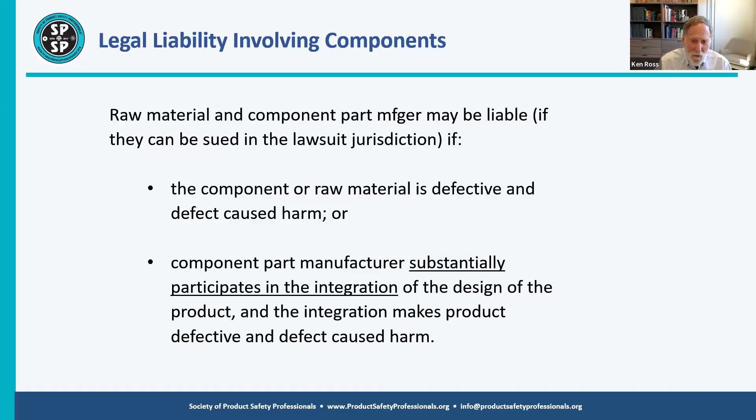So sometimes the law discourages actions by one side or the other, which is not that helpful from a safety standpoint. So you're the OEM dealing with suppliers. So I'm the OEM, I'm buying components.

You've got to decide which ones am I going to buy, which ones am I going to make myself, which suppliers do I have? Do I have multiple suppliers? Is this a safety critical part, raw material, and service?

Now, interestingly, because of that law, it's an interesting question whether the OEM wants to help the component part supplier design their component part. And of particular interest to me, what is the role of the OEM in being sure that the warnings and instructions supplied with that component part are adequate? Do you really want to do it?

So the more the OEM gets involved in the design and the warnings and instructions on that component part, the more they're responsible for the ultimate component part. And so if that component part was designed incorrectly or there were inadequate warnings and instructions, they can't blame the component part manufacturer because they're going to say, hey, wait a minute, you approved my design, you approved my warnings and instructions. So if there's something wrong with any of those, you OEM are responsible for it, not me.

So there can be a lot of tension between an OEM and a component part supplier because each of you are trying to protect yourself in the event something goes south after the product is sold. So there's both the legal side of it and the contractual side, the insurance side, and the safety side. And I will say sometimes they don't match up as far as the encouragement of what's going on.

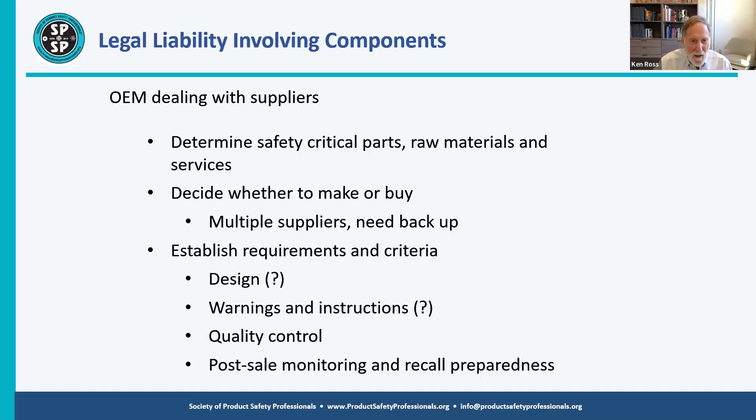So as a result of this, we the OEM are trying to obtain contractual and insurance protection. We're trying to figure out if that really protects us, whether it's adequate, and in what situation will it protect us? Again, the more involved the OEM is in the component part, the more likely they are to be responsible, and they cannot blame the component part supplier.

Lastly, you don't want to rely on contracts and insurance to protect you. You as an OEM want to be sure the components you buy are correct, they're installed correctly, and that they are safe for their intended use.

Now, on the supplier side, it's very different. Do I want to assist the OEM with a selection of appropriate components? I think you do, but some lawyers are going to say, no, we don't want to help because the more we help our OEM, the more responsible we are. We want to confirm the components are being used correctly and installed correctly. That's my coffee maker example.

Should my company have been sure that the coffee maker manufacturer both selected the correct thermal cutoff and installed it correctly? Well, on reflection, yeah, we probably should have done that. Should we have had to do that? No, we shouldn't have had to do it. They were a coffee maker manufacturer. They should know about it.

One thing that's very interesting to me is I'm an OEM, I'm buying component parts. What if I find that the warnings and instructions of my component part supplier are inadequate? They don't meet the ANSI standard. What do I do? Do I tell my component part supplier that they need to redo the warnings and instructions? Do I need to have them hire a warnings expert to come up with better warnings and instructions?

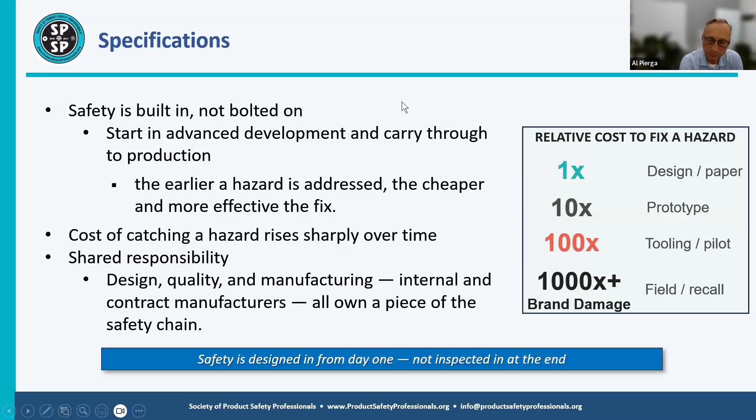And when it comes down to dealing and collaborating with outside suppliers on parts, that becomes even more important to make sure there's clear communication and expectations are well managed. Which also going in reverse, as Ken mentioned, being a component supplier, you need to clearly communicate boundaries and kind of the operating parameters that are acceptable and communicating any specific technical limits. So it's important that the communication is clear and there's clear alignment between all parties to emphasize the important safety elements in the design. Can you please switch to the next one?

So one thing that is important in there, right, is to make sure specifications are written very clearly. And that really sets the stage for everybody to align and understand what the expectations are all the way through the product. Things like physical characteristics, size, weight, color, chemical makeup, material properties that you're looking at, any performance specs that you're looking at,

and the life. Because one thing to remember is that the expectation is the product remains safe through the life of the product. Often the question is, well, is it warranty? Is it maybe 5 years past or whatever that is? I think it's important to keep in mind that it should be through the useful life of the product, whatever that may be. It has to be clearly defined, and then we can work from there. Next, please.

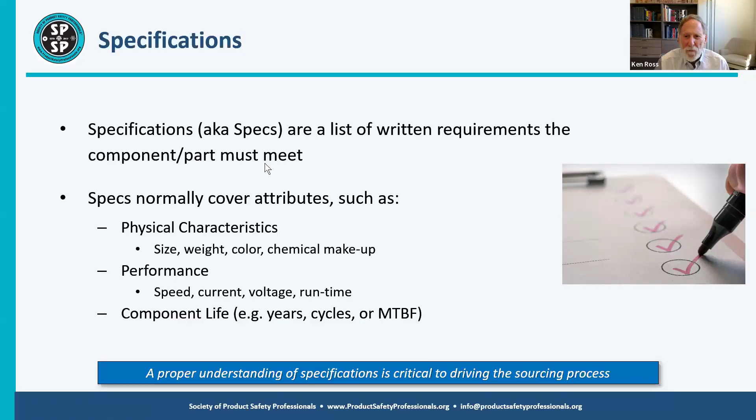Oh, oops, sorry. That's okay. Yep.

So further on the specs, basically we're looking at the standards that we have as underpinning within the organization. What are your engineering standards to make sure that they're suitable for specifying these critical parameters that need to be maintained to maintain safety? Any models that you develop, drawings, how well they're specified, anything that we need to implement in terms of specifying critical dimensions or maybe critical functions, all those attributes, processing also, material specifications, all that is important to capture and clearly draw the line of what is acceptable and how good it has to be to meet the objective.

Of course, applying external standards that are applicable. Sometimes the standard may not be entirely applicable, but you want to apply the elements that would be reasonable in the case that you're dealing with to mitigate hazards, right? So there are some good engineering solutions throughout the industry that address many challenges that we're still seeing and we'll be seeing for a while. So that's a great resource to really know those and apply them appropriately. Of course, the federal standards we are obligated by law to comply with.

The CPSC governs certain product categories. FCC applies rules in many ways. FDA, for example, you got FDA with lasers, right? You don't think FDA is with lasers, but they do that. So we've got to be very familiar, and prior to implementing a technology, we need to understand the obligations that apply.

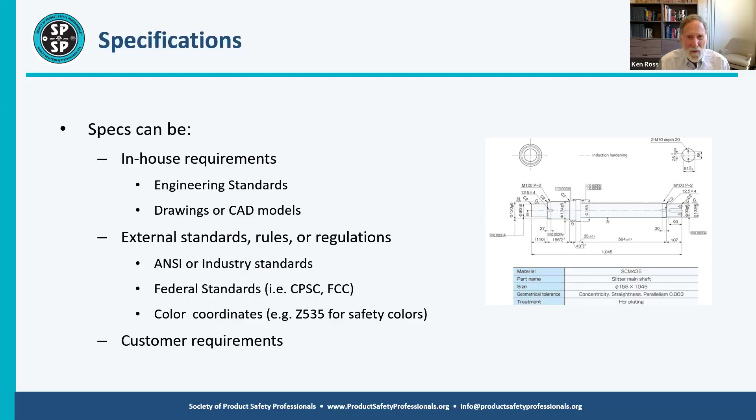So moving on to get more granular here, there are multiple ways to specify products, and different control methods that we can apply through the process. Oh, the previous one, please. Sorry about that. Some things come to mind in a clear list: dimensions, tolerances. What we often don't think about is how you want the test to be performed to validate and ensure that the design and the parameters are maintained.

Also, when it comes down to safety, you definitely want to talk about statistically meaningful sample sizes. Testing 1 or 2 samples is not statistically significant, as you know. That is always a tough situation because depending on where you are in the development process, you may not have enough. So it's very important in the beginning, when you outline safety concerns or safety critical elements, that somewhere in a test plan you identify the increased number of samples so the teams can plan to accommodate the validation.

And then it's extremely important to have acceptance criteria that are very clear, to make sure that the target is clear and that the decision can be made without really second guessing. And of course, I would suggest that everybody reviews the acceptance criteria and buys into it, because there are plenty of circumstances where things fail and then suddenly the criteria is in question, which is not really a great way to solve the issue, but that's not uncommon. So coming to the same conclusion and agreeing is critical.

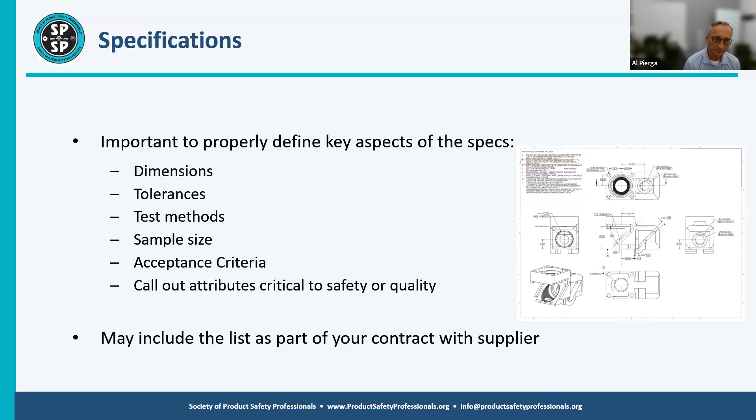Here, what you'll see is just a sample of what a specs drawing could be. You clearly describe in this specification the tests that are used to validate the specifications that are to be met, the procedures, and also the sample size that you're looking at. Those are important things to outline, as I mentioned earlier, having that clear up front as a test plan, as an expectation, and also the pass criteria, so everyone can align and plan accordingly to assure that all these are executed completely and successfully.

Well, thank you. I'll pass it on to Mark. Okay. Mark, are you there? Yep, I sure am. Okay, so we're going to start.

Okay, so we'll go from the specifications to the supplier selection and evaluation. But before we do that, let me just ask Al a question. You've got the specifications. Obviously, you've got to follow up and be sure that they're meeting the specifications. How involved do you get in confirming that they are meeting those specifications, as far as the test methods and other things? Yeah, so I think Mark will cover quite a bit of that, but generally speaking, this is a thorough process all the way through.

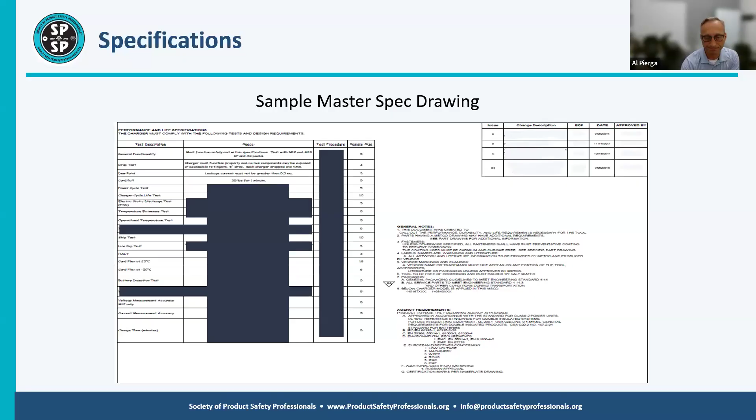And so ideally, you want the products at incoming inspection to come in with all the substantiating evidence that they do meet the obligations they were asked to per drawings and specs and all the parameters we defined earlier. So it's quite a bit of a system that needs to work in concert. But once it's set up and it's moving through, you can work through very complex cases very efficiently, and you have all the controls set up for long-term monitoring. Okay. All right, Mark.

Yeah, thank you. So as Al said, it's a big deal that you set up everything on the front end. And I think one of the key things there, like Al was sharing, is the specifications, the drawings; being upfront with those is really a big deal. One of the things that I like to do and suggest to folks is when you get in with a supplier, at whatever level, build a relationship. And I don't mean that facetiously. I mean, you really have to get involved.

And I like the concept of partnership versus supplier when you can, because partners have a tendency of being more tied to the result. They're more tied to the success of the business. And whenever you can develop that concept of a partnership, there's skin in the game. They want to develop something that meets their obligation, not because the law says or because a contract says, but because they want to. And they're in this relationship with you. And I think that goes a long way.

What helps is when you have a strong, robust set of requirements, you can go to your partner and say, these are what I'm trying to achieve. Do you agree? Can you work with me on this? Is this something that makes sense to you? The more nebulous it is, the more open, the more flexibility they have, one, the less certain you're going to get what you want. But secondly, there's more opportunity for things to go sideways.

And I'm not saying you've got to tie everything down in infinite detail, but I think you have to do what the safety professionals do best, which is do a hazard analysis, understand your product, understand the point of this component, understand its role in relation to the safety of the product, what can go bad, and tie it down commensurate with that level of importance.

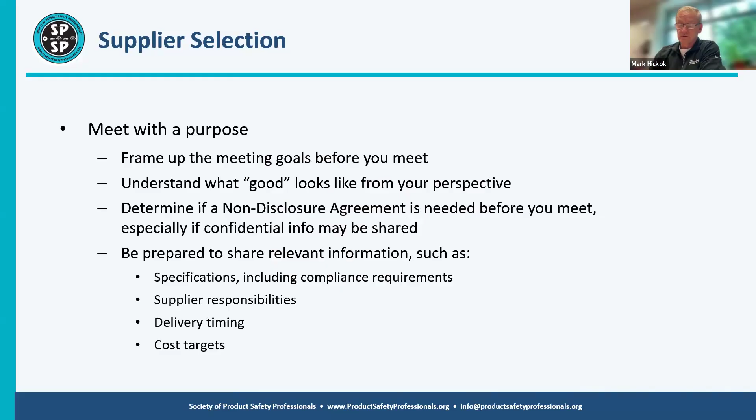And we're going to talk about that. And then we're going to go look and compare what we get. And we're going to say, well, we looked at you as well. And from what we're seeing is, yes, we agree with you. Or in part, we agree with you, and in part, maybe we could do a little better. And here's where we need to go better.

If you audit for the first time at the end of the stage, you're probably making a mistake, to the extent that you had a chance earlier and you didn't take advantage of it. So it's not really a validation anymore. Now it's an initial audit and you probably got a problem. So these pre-meetings, these pre-assessments, those early opportunities become kind of mini audits in their own way.

And that gives you this opportunity to pick something up, figure out how to make sure that they're doing it well. They made changes. You can measure against what you think they should have been doing and see whether those changes are going to be effective. And you can move yourself forward. So validation is exactly that. It should be validating what you already know or believe to be true. But if you're learning at that point, it might be a little late. It depends on what you're doing.

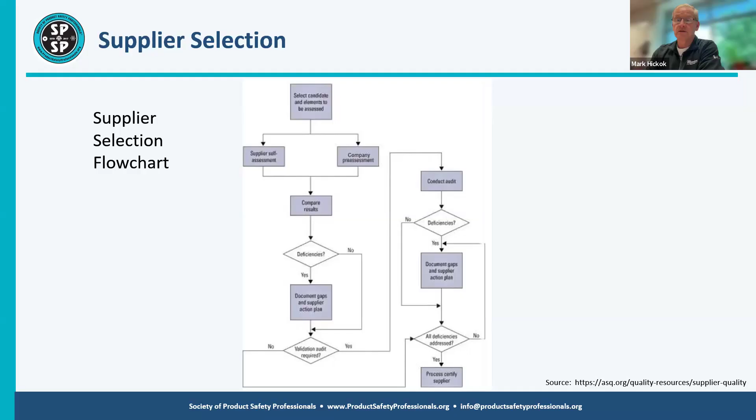So one of the things we love to do, also as part of our audits, is set up a test plan. We don't just audit and walk around and watch people do things and measure things and do checklists. There's certainly some of that that's important, but we also love to do test plans. And one thing about test plans is that when you do, especially a component like an electrical component, those very often have ratings and they're built off of some set of standards, whether it be a product standard from UL or a safety standard or what have you.

And they're typically meant to say, yep, this component can carry this much energy or can hold this much temperature, it'll deliver this much liquid, whatever the answer is. But it's almost universally not set up to check exactly the situation you're in with your product. So it's really important to look at the product you have, know what needs you're asking that component to meet. You believe those specifications gave you a chance to say, yes, I picked the right one. But now I have to go exercise that to see, is it really going to be effective in this thing?

So set those goals. Figure out where you're going to do it. Am I going to do it? Am I going to have the partner do it? Am I going to send it to a UL type lab and have them do it? Or a third party evaluation center? What do I need to do?

These are all important. One of the key things I think most people miss is the method. So when you get down to the test definition, we've seen a number of people that will test to UL and they'll do the minimum of something in UL, and then we'll come out of it and say, well, UL gives you this option and we like it that way. And they're like, well, we didn't do that. Get that up front, get alignment on what that method is. So when you get the results, you can measure them against an acceptance criteria. You're on the same page every time.

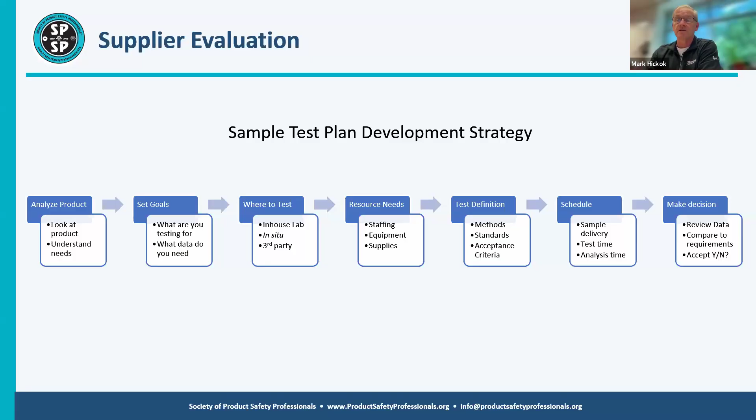Scheduling obviously makes a difference. So make sure you've got stuff in time to do that and do a good analysis so that you don't end up running into timing issues. And then make a decision. All of this data, all this information, all these conversations put you in a great place to make a decision. So now it's time to go make one.

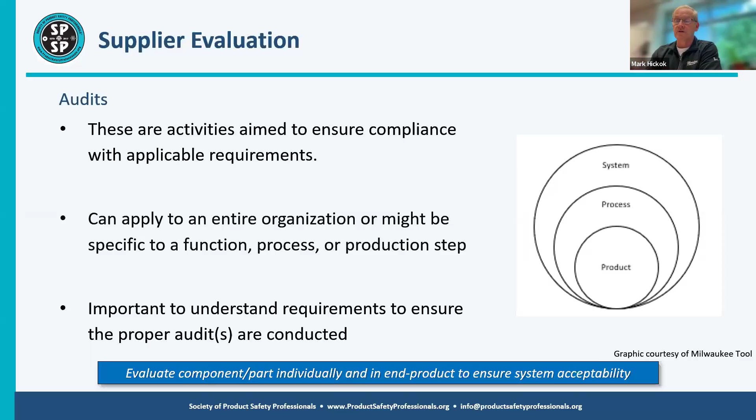Absolutely, no problem. So after you've got all this stuff done, we're happy, we're moving forward, then we go back and audit. And I like to consider things like a 3-phase audit process. I like to audit the product, make sure it's right. That's part of the testing we talked about. Audit their process. Can they make it? Can they make it consistently at rate? Audit the system. Is it controlled? Are their suppliers controlled? Is everything going in right? So again, go as deep as you need to go, but making sure those things are done is a big deal. It's not over just because I made a selection and made a decision.

Okay, next. And when I go through these, one of the things is there's always multiple functions. So maybe it's not one visit, maybe it's multiple visits. Maybe it's not the same person. Maybe there's multiple people. Maybe there's multiple things that have to be done. Fine. Plan for it, set it up ahead of time, be ready to go. Okay, next.

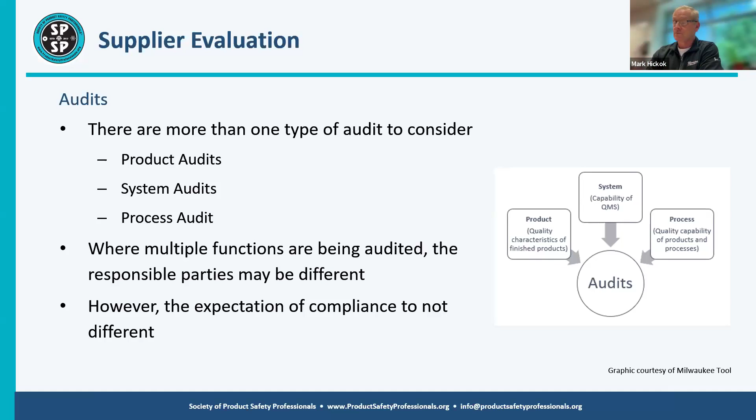And be prepared that this is, again, not a one and done. This is not something I do, make a decision and move on. You might have to have ongoing quality. It's not uncommon to hear the concept of the golden sample or the golden pencil. There's always going to be a great one. Everybody's going to give you their best effort on the front end. Can you actually make it 10,000 times a week, every week for a year, with that level of quality?

Have you done the right things? Which means you've got to monitor and find out if they're doing their job. So don't stop just because you've made a decision. You've got to keep looking at it. A lot of factors can go into it, but you've got to keep after them. Okay, yeah, we've had that problem lots, particularly with products coming out of Asia.

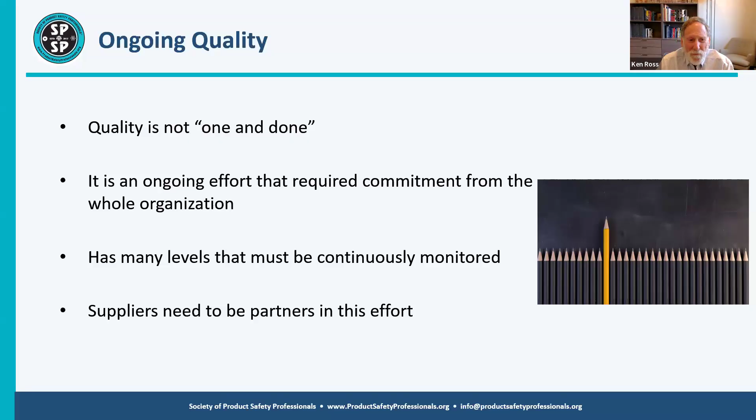Whether it's that they give you the golden product at the beginning, or they change the material after they give you the sample to save money, and they don't tell you about it or get your approval. So you have to be very careful, particularly when the components are being made offshore. Absolutely, and really, components and materials are big.

Watch process. People can go faster and make plastic parts faster if they increase the temperature and mold pressure. You can embrittle the plastic and make it garbage. So they're now delivering 15,000 a week, but you're getting 15,000 a week of garbage. So watch that, understand the parameters. So when they want to make those changes, you can say, nah, I don't think so, because it doesn't make sense because you're going to make a problem. Or let's validate that change before I let you go full production on it, because it can make a huge difference.

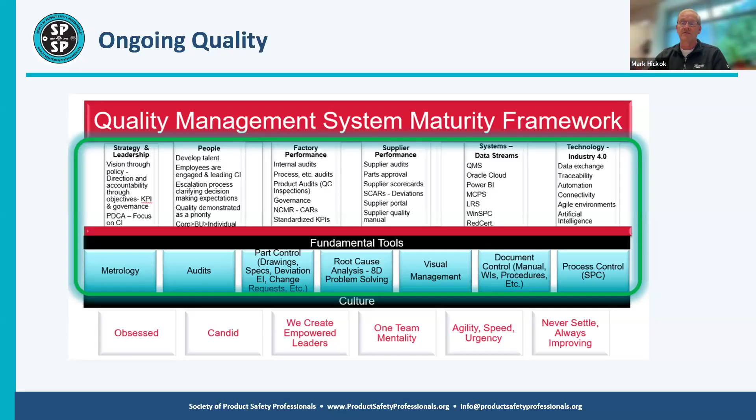Okay. And then last, I think we talked a little bit about it earlier, but work with your legal professionals and make sure that your supply agreements, to the extent you can, cover all the key things, all the key specs, the things that you want to deliver, all of those little things that you talked about in your discussions. Get them on paper. Will it support everything? Will it be completely clear? Can it be completely legally defensible? Will you still have arguments?

Yeah, maybe everything's going to be great. Maybe it's not. But you will give yourself the best chance to handle this by working with quality legal professionals and getting a really good agreement, so you're on as good a page as you can be. And then see where it goes. But I think that gives you a great chance to succeed.

Well, and let me say from the legal side of it, be careful that your lawyers aren't too careful and too cautious, because you'll wind up never having a supplier who wants to sell to you, because you're trying to shove liability off on the supplier when it really isn't called for. So you want to be careful, to have them be realistic about the relationship you're developing. And to a certain extent, we're relying more on our good working relationship and not going to meet the exact language of that contract. Okay, let me get a couple questions and then we'll be done.

How should the conditions of acceptability be addressed? This is a concept that is not very well understood by many design engineers, procurement, and other members of the organization. There is a misunderstanding that any NRTL certification is sufficient. I assume you guys know what that means. Yeah. So if I can take a step at it, I think it's very much connected to Don's question that follows. In my mind, this goes into the responsibility of the integrator. The integrator is the one that assembles these components into finished product.